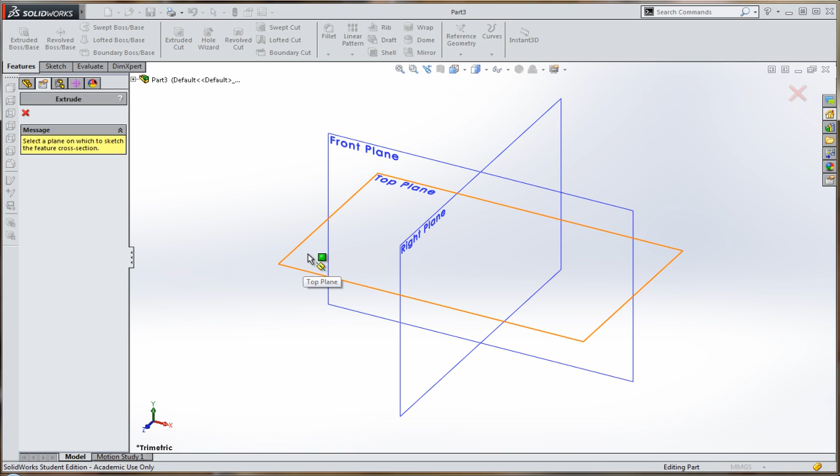by clicking just there. Before we get too far down that road, I just want you to make sure that in this bottom right corner the computer's set up to work in millimeters. If it's not, sometimes it likes to go over to inches, then your project's going to end up enormous. So let's click on Extruded Boss Base and let's create a new part that's going to sit flat on the tabletop once it's finished, just here like this.

So I'm going to grab a corner rectangle, which is the shape just here, and I'm going to use that to roughly create the approximate size of the base piece of my toast rack. Make sure before you do anything else that the very first click that you make starts at this origin point just here. You see this axis, and if I move my mouse over it, you see a little orange circle appearing there. So I'm going to click and hold there, and I'm making it about 100 wide and about 50 tall.

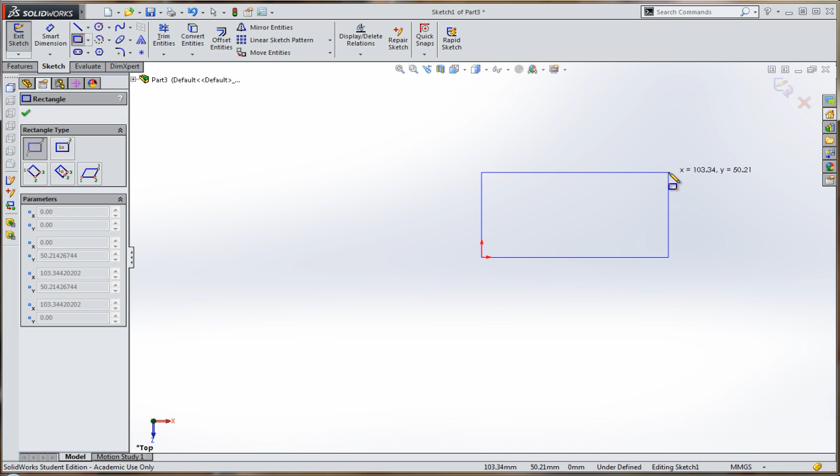It doesn't have to be perfect because we're going to use the dimension tool just here to make sure we set specific sizes. So that's 100 and that's 50, like so. What I'm then going to do is grab another rectangle and I'm going to put my notch in the middle of my toast holder, because that's where the upright piece is going to be slotted in.

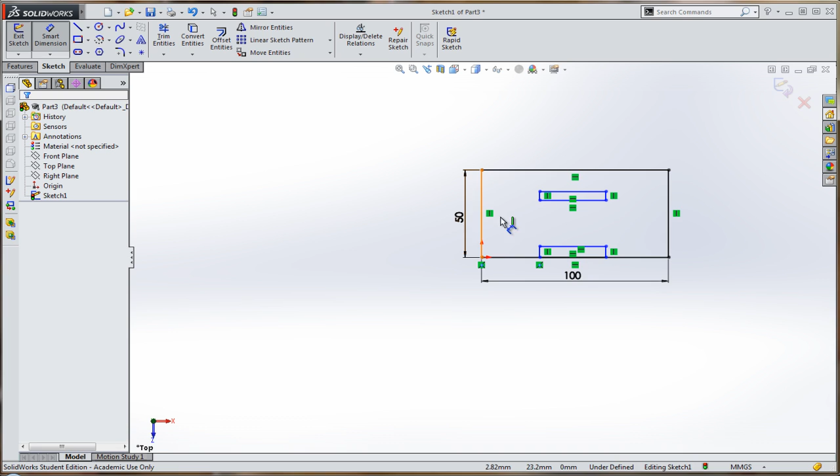And what I need, and you can see the computer's helping me here as well, is another rectangle. I'm going to cut a notch in a minute, which will live partly on that bottom edge and come into the shape like so. We've not got all black lines yet, so we're not fully defined. So I'm going to grab a bit more smart dimensioning, and I'm going to say that I want the overall width of this to be about 20 millimeters, the overall height of this piece to be about 3 millimeters. It's starting to get a bit hard to see, so I'm just going to quickly click on here to zoom and fit my model.

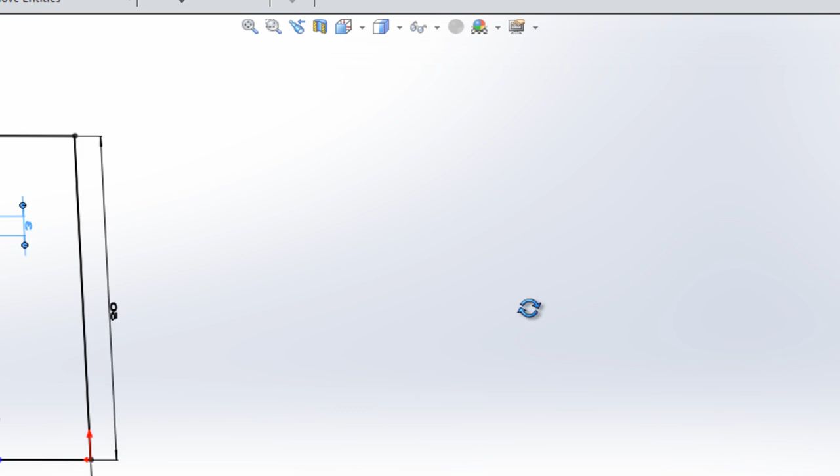Incidentally, you might, by this point, have accidentally clicked and held down the middle mouse button and spun your shape around. You can spin the shape in 3 dimensions, and that makes it quite tricky to work out what's going on. If you ever do that, you can quickly reset the view by clicking here and looking again at the top surface. Anyway, as I was saying, I'm going to get some more dimensions going on.

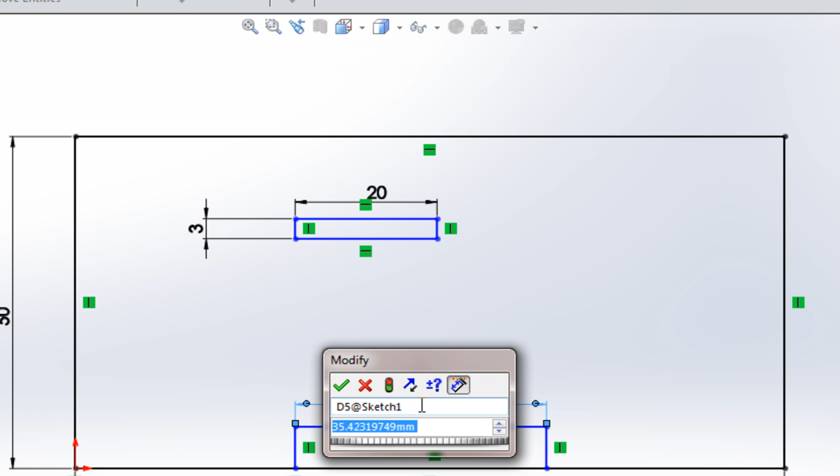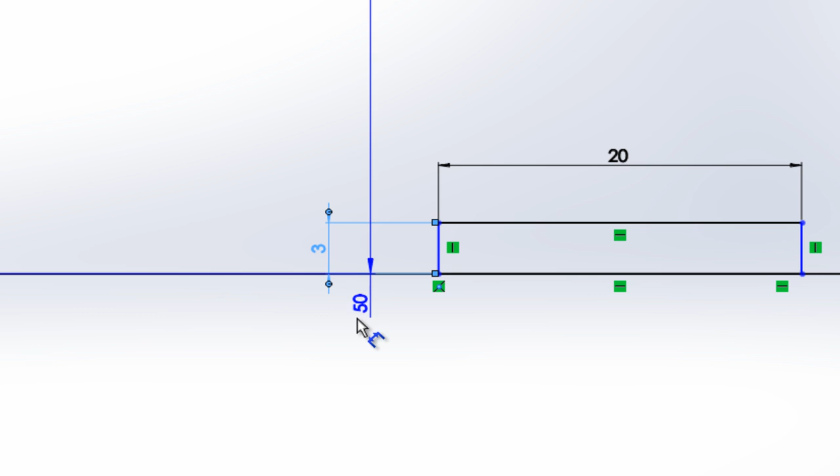Let's say the dimension of this is going to be 20 millimeters as well. The height of this is going to be 3 millimeters, and we need to give it a bit more detail as well. I need to tell the computer whereabouts this block actually sits, how far it is from here to here. So if I click once on this edge, if I zoom in a bit, you can roll the mouse wheel to do that. When I click once on this edge, I can tell the computer what this distance just here is.

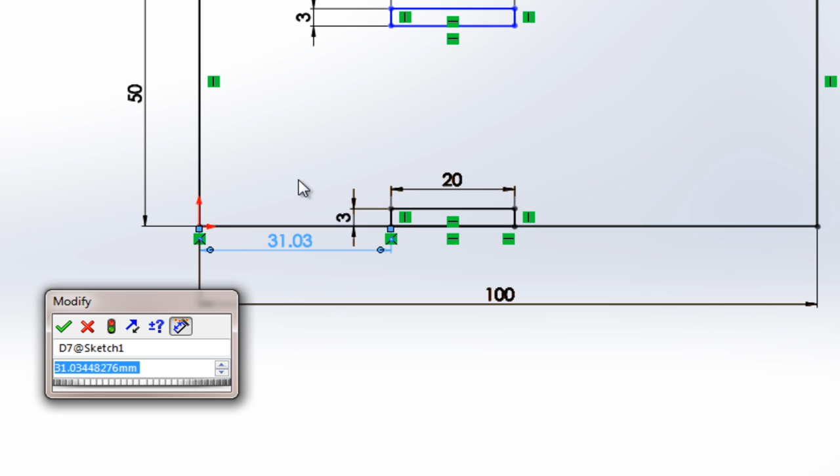Let's think about this for a second. If overall that distance is 100, and this distance here is 20, and I want this to sit in the middle, what distance does that need to be? Well, 100 take away 20 is 80, and if I divide the remaining space between these two sections, that's 80 divided by 2, which gives me 40. So this distance here is 40. Okay, so that bit there's nice and happy. I need to decide whereabouts I'd like to have this sit.

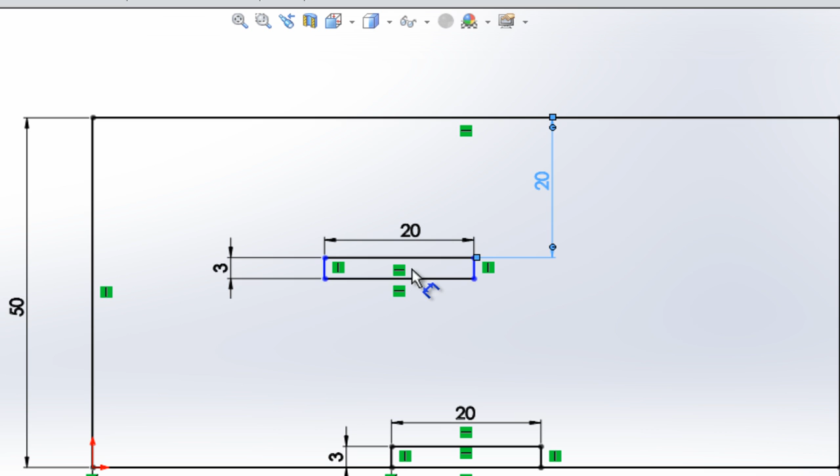I reckon for this one I'll put that about 20 millimeters from the top. I'm going to click once on this edge, once on this edge, so the computer knows what distance we're measuring, and I'll type 20 in there. I'm also going to pop this nice and central, so that also needs to be 40 millimeters from the outside, and I'll place that dimension there so it's nice and easy to read.

So what I've now got, because I've provided all that information, is a fully defined model. You see at the bottom here it says fully defined. That's a really good sign, and if you get to that point, you know you're doing something right.

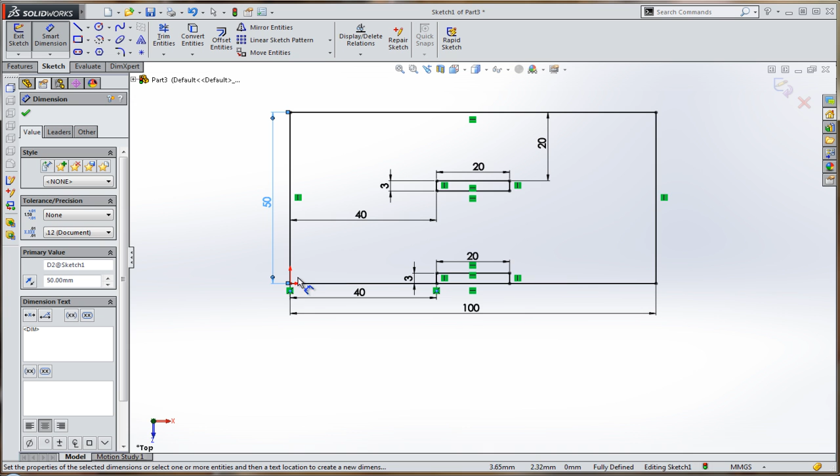The final step in this process is just to cut this notch out, because at the moment I've got 2 lines sat over the top of each other. I've got a line formed when I drew that initial rectangle, and also the line formed when I drew this second rectangle. So I've got 2 things here I need to trim out.

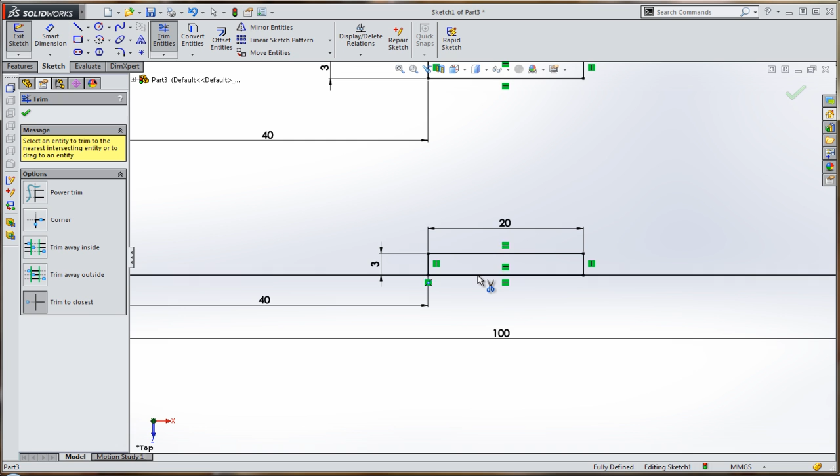So I'm going to grab this Trim Entities tool. I'm going to make sure I choose the option that says Trim to Closest. A lot of people forget to do that, so make sure you're not one of them. Trim to Closest, and over here I can click once, twice, and I've now cut that notch out of my piece of work. Okay, so that is what the finished 2D shape looks like.

So now I've finished sketching, I can exit that sketch and pull it up into 3 dimensions. So I'll move my mouse into the top left-hand corner and choose Exit Sketch.

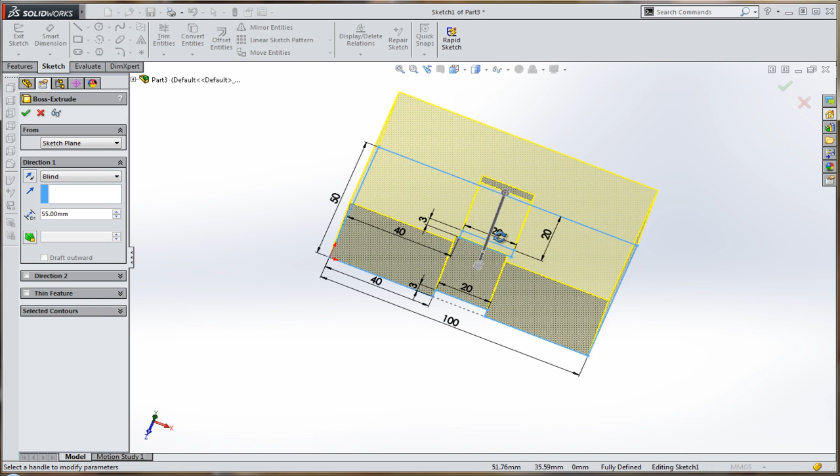The computer now pulls my shape into 3D form, and I could choose a random amount of extrusion, as we call it, of pulling up, but I want to be much more specific than that, because again I want a fully defined part. So what I'm going to do is type in the number I want.

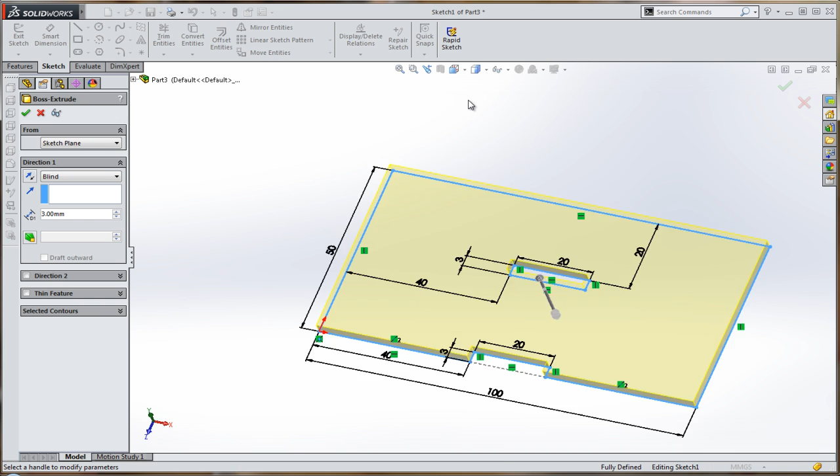Now we use 3mm MDF in school, so the height of the piece of work is going to be 3mm. So I'll type 3 in there and hit the enter key, and that snaps that down into place for me. Again, I can look at it straight from the top still, or I can look at a nice 3D view of it. That looks pretty good as well.

But I reckon I'm there now. So I'm going to click on this green tick, and I've now got my first complete part for my toast rack. Okay, if in the future I want to go back and add some more detail to this, which I'm going to do right now actually...

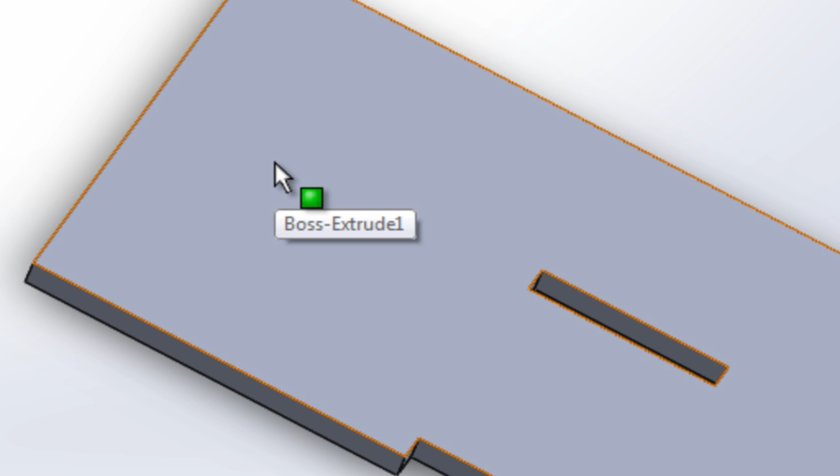I can get back in here at any time by clicking on that surface, right clicking, and then choosing the option that says Edit Sketch. That gives me my dimensions back, and I can then set the camera up so I can see.

What I want to do this time is add some nice curves on these corners, because at the moment this is quite a square, angular shape, and it'd be much nicer if it was a bit more smooth on the corners.

So I'm going to use this tool here called a sketch fillet, and what that does is cut little arcs, parts of circles, into corners for you. So I'm going to make the corner parts quite smooth. I'm going to go for maybe 5mm fillet. You can experiment with different values.

I'm just going to click once in this corner. You can see and get an idea already of what that's going to look like with these 4 corners. Okay, click on the green tick to put that in place. I'm done with filleting now, so I'll tick that off. And now let's exit that sketch once again.

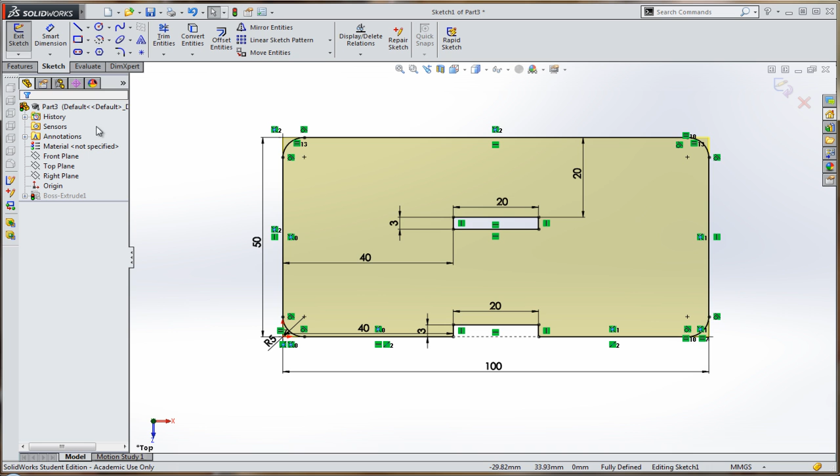I've now got a really nice curved corner on my part, on my model, and it's still fully defined. So the last step is to save the piece of work in my H drive, so that I've got that all ready to form an assembly with once I've made the upright part. And so that is how you make the base piece.